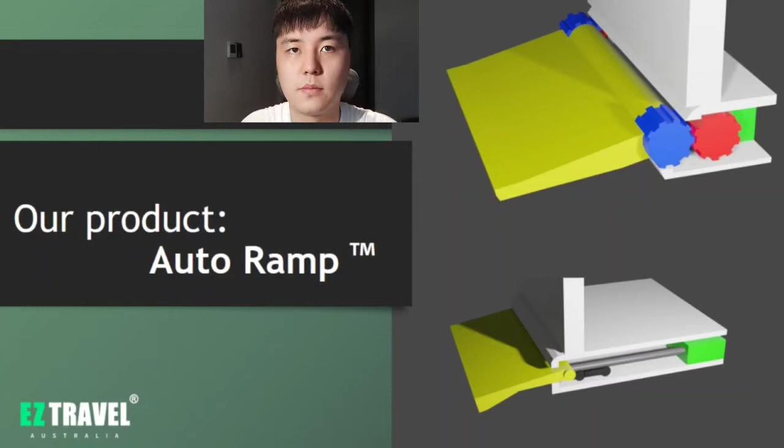To solve the problem, our company provides a safe and reliable product, the auto ramp. Our product will be installed at the bottom of the train door to provide a safer way for passengers. To suit different types of trains, we offer two options for our customers.

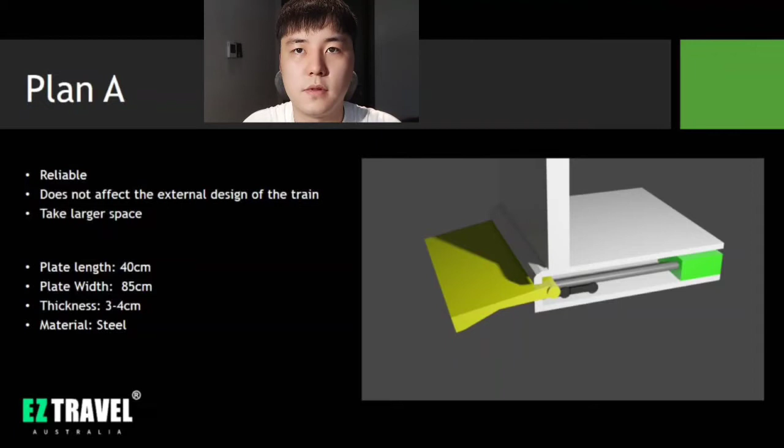The first design is installed inside the train, which is reliable but takes more space. The second design is installed outside of the train but takes less space.

Because most wheelchairs are around 72 centimeters wide, our platform will be designed to be 85 centimeters. The length will be changed according to the different type of trains.

The platform is made of steel with a thickness of 4 centimeters, and there will be anti-slip paint on it to ensure safety. According to our calculations, the average capacity of such platform is about 200 to 300 kilograms, which is sufficient for passengers to pass through.

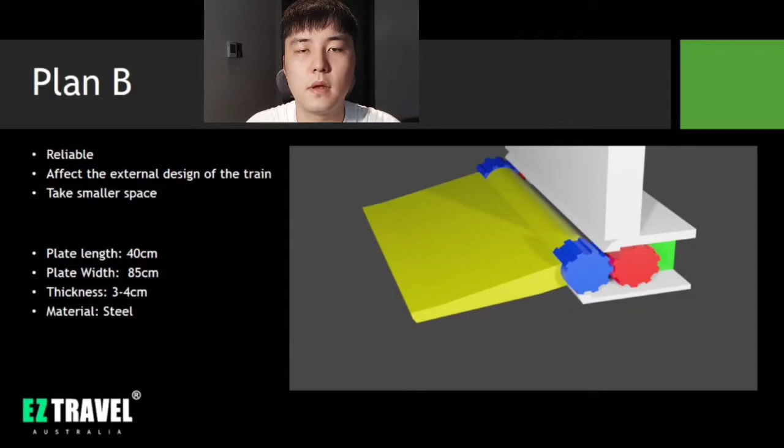To ensure the safety of passengers, when the train arrives at the station, the automatic platform will drop first, and then the passenger door will be opened. This animation shows an example of the use for our product. Next, Noor will show more detail about our product.

Thank you, Yuanbo. Hi, my name is Noor, and I will go through the technical aspect of our product. Design A is comprised of five primary components, driven by a 24-volt DC motor. Two 24-volt DC motors, two telescopic linear actuators, two shafts, two roller wheels, and one plate form the system.

Next, Design B, which is a much simpler design, is comprised of two DC motors, 4 gears, one cylinder, and one plate. The opening and closing time for both designs is around 5 seconds.

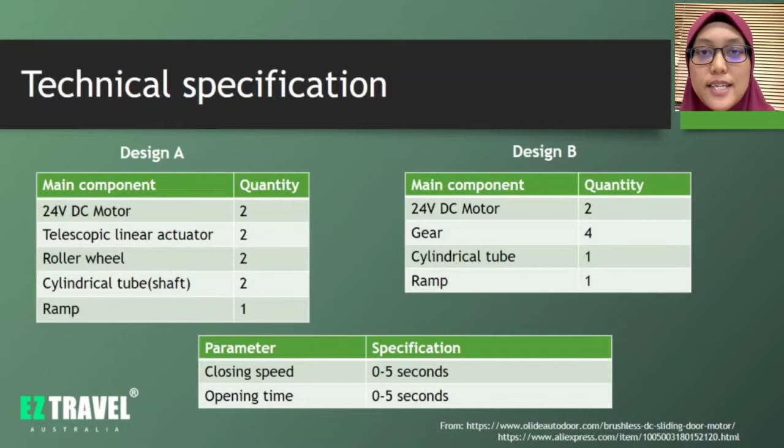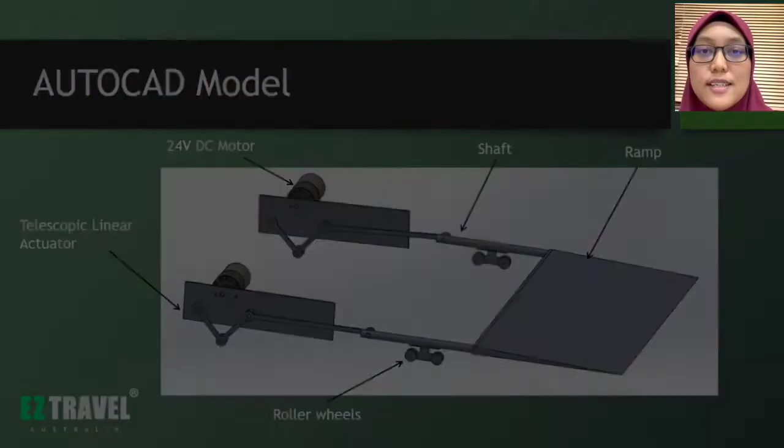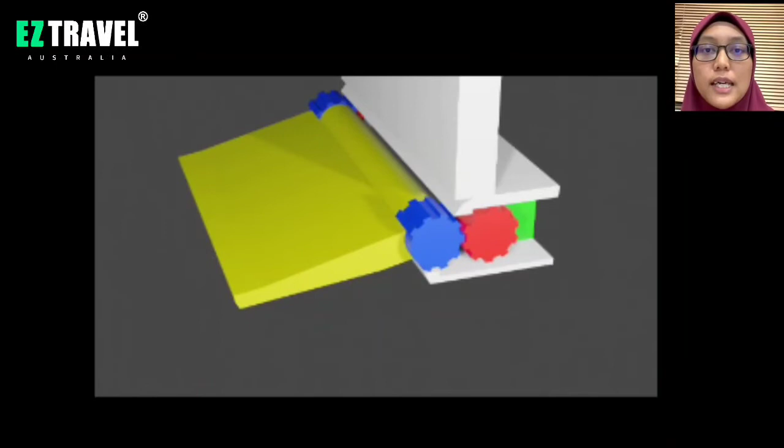Next, the ramp in System B will fold up into the train door instead of into the train body. The 4 installed gears will assist the folding motion of the ramp. As Yuanbo previously stated, this will be utilized in much smaller train doors.

Next, I will pass to Junyi for our business and market. Our market will be focused on New South Wales government railways, and the start point is Sydney. Unfortunately, till today, Australia still uses manual plates and requires the help of staff. Even the up-to-date train called Mariyung also doesn't have this feature.

However, in Singapore, they already have a similar design, but only on some buses. But sadly, it's only manually controlled by the driver.

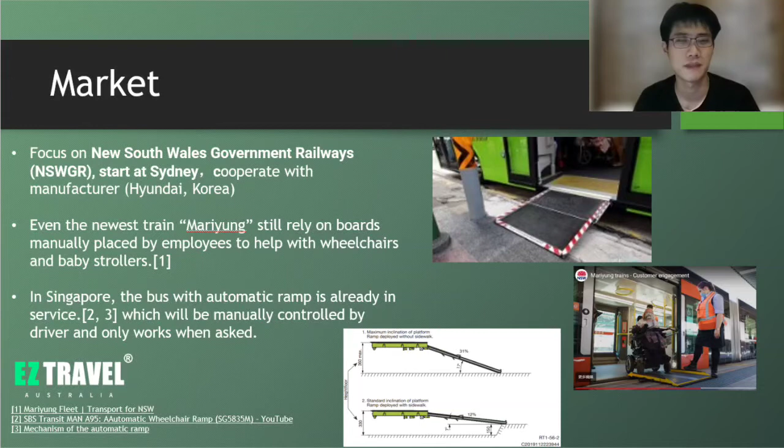To compare with the manual plate: although the manual one is cheap and simple, it takes a long time to call the staff and set the plate during rush hour, and the service may be unavailable for stations in suburbs and at night.

In comparison, our auto ramp will be set quickly before the door opens. So in every station and anytime, anyone can have a safer experience, getting on or off the train without the help of staff. We actually have a large target market already.

There are around 1.9 thousand carriages and 176 stations in Sydney, and more than 3 million passengers every year. Just imagine how busy the staff is, if only 3.6% of the Australian people need a wheelchair.

Furthermore, we can also be a part of the government program, since the New South Wales government has signed $2.3 billion for accessibility service. Now it's time for the business model.

The revenue will come from the New South Wales government, Sydney train companies, and we can get some sponsorship through welfare institutions and disability unions. Before the product is sold, we have some pre-costs for designing, testing, and advertisement.

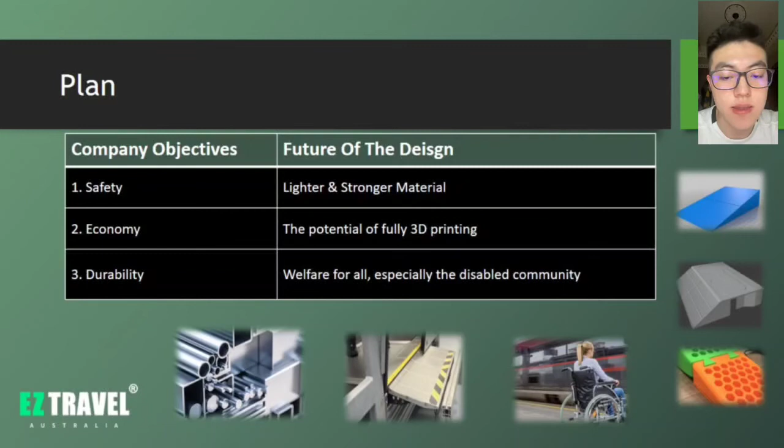Our company started the project a few weeks ago, and we will perfect and finalize our design in about half a year. We then assign one year for prototypes and tests, and at the beginning of 2025, we plan to manufacture and install our design with NIF, which is a fleet to operate the NSW TrainLink electric intercity services in New South Wales. Hopefully, our products will be ready in the year 2026.

For the ethical and social concern part, it can be concluded into three benefits. First is an increased national sense of belonging. When younger citizens see the state's efforts in transportation for the disabled and the elderly, they feel comfortable about their retirement.

They will have a stronger sense of belonging and identity to their country, so they will work harder to give back to the country and society.

The second and third points are creating a loving and harmonious social atmosphere, and improving the public sense of morality, social responsibility, and the overall quality of citizens.

When citizens of a country see the various efforts made by the country for the safety of people with disabilities and young children, this behavior will radiate to the entire social system. Everyone will be affected, and they will be more willing to help each other. Society will become better, and the overall quality of people will become higher.

For the risk part, it can be divided into two parts. First is the safety issue, which has already been discussed in the section above. The second part is the investment concern.